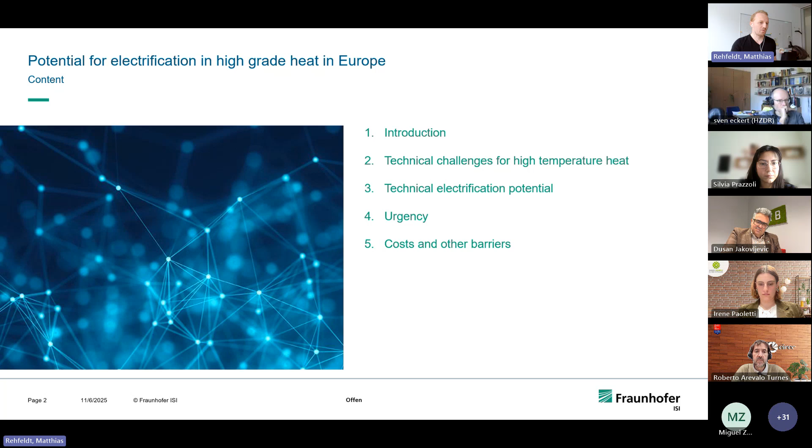Our main assumption is that the demand for basic materials like cement, steel, paper, plastics and so on will remain. By the end of this century, we will still be using these materials. However, the way we produce them has to change, and I want to make an argument for that on this slide.

Another third is coal and coal-derived energy carriers, mostly located in the iron and steel industry. Then we have some use of biomass, highly niche, where there are internal residues from production, so it's not something you can roll out across the entire process heat requirement. Lastly, at the moment roughly 4% of process heat production is electrified. This again is highly localized in the iron and steel industry for electric arc furnaces in the secondary steel production route, but not so much in other industries.

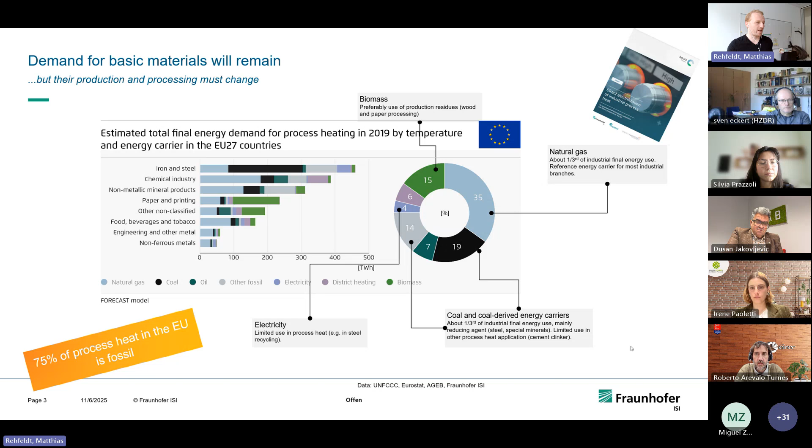So when we look at this process heat, it's not just any process heat. The temperature level is of high importance to identify which technologies could be used to decarbonize this energy use and what the challenges are. We distinguish two large categories: first, low to medium temperature heat, which is hot water and steam usually, and we make the cut at 500 degrees Celsius. In other publications it might be at 400 degrees, but that doesn't really change much.

For those high temperature heat applications, the technical solutions are highly specific. You cannot use the same furnace and kiln, so the same process heat installation, for the production of cement or for steel. It's very different, and that creates a challenge.

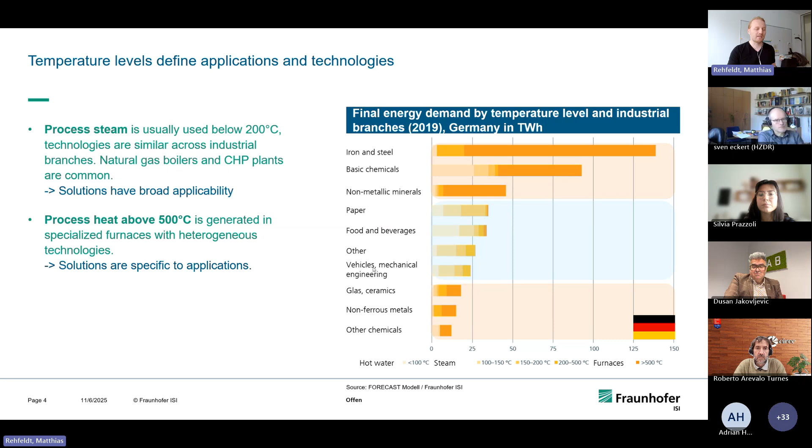Now, so far for the introduction. In the next few slides, I want to talk about what the technical challenges are actually, which potentials could still be realized and might be realizable in the next years, and third, what are the non-technical barriers?

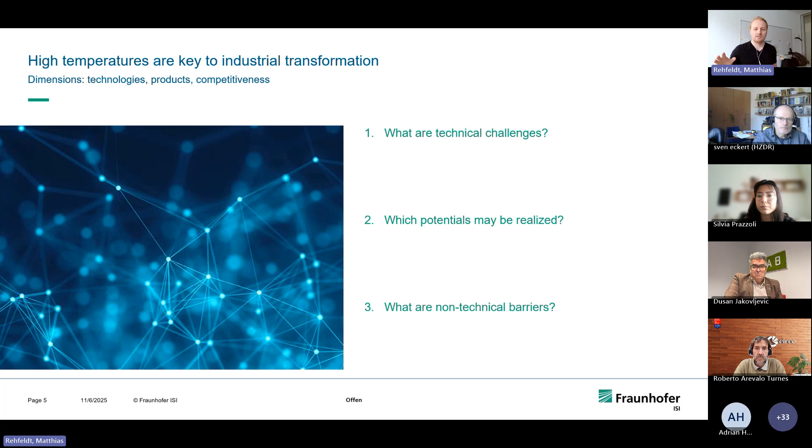Let's jump into it. First, let's start with the challenges for high temperature applications in process heat generation. On the left side are several technologies that might be used: heat pumps, electric boilers, obviously for the low temperature areas. Then we have resistance heating, which is currently the reference technology for electrification in the high temperature area. In addition, induction heating and electric arc furnaces. However, the latter two have restrictions in terms of materials that can be processed and geometries that can be processed.

I'm happy to say that in the next discussions we have, there will be some insights on how to extend these limitations or resolve them. Resistance heating is primarily limited by the energy density of the energy that can be applied, so for high temperatures and high capacities, there are currently limitations on what can be electrified.

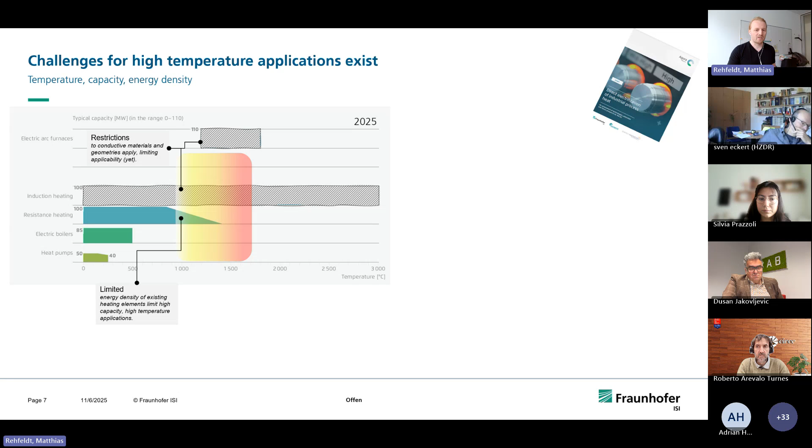Thus, there is a gap in the high temperature area, presented here roughly at about 1000 degrees Celsius, and in high capacities, there is a lack of technologies to cater to these demands.

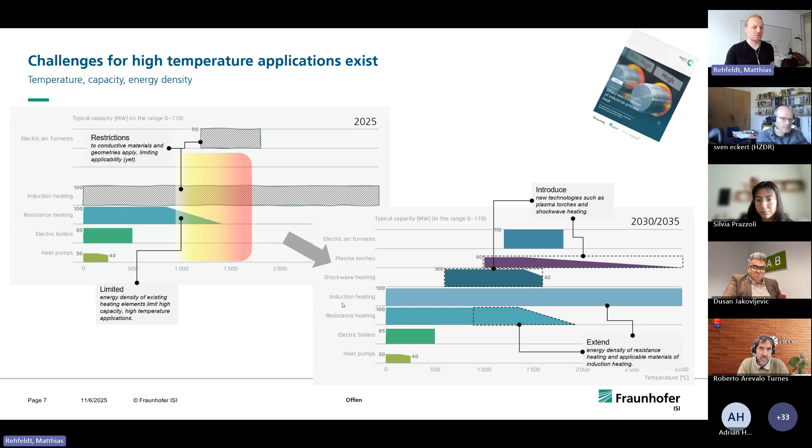In our publication, we investigated this and we see two options. First, we think that the applicability of induction heating and electric arc furnaces in some cases can be extended to more materials to resolve issues with geometries. The second would be to introduce new technologies currently not on the market, like plasma torches and shockwave heating. Together these could close the gap in the high temperature area we see and would allow us to electrify all of, or most of, process heat generation and demand.

That's the final energy demand in European industry as of now. We can see that about a third is already electrified. However, that's not process heat—that's usually electricity used for motors, drives, cooling, lighting, electrolysis, and so on.

However, already today, an additional 40% of the energy demand could be electrified with technologies already available. In many cases that's low to medium temperature heat, steam, hot water, but also high temperature heat is included. You can already address several applications of high temperature heat with existing technologies. We estimate that you need new technologies, or an extension of technology capabilities, to electrify an additional 20%, and we think these technologies can be available by 2030 or 2035.

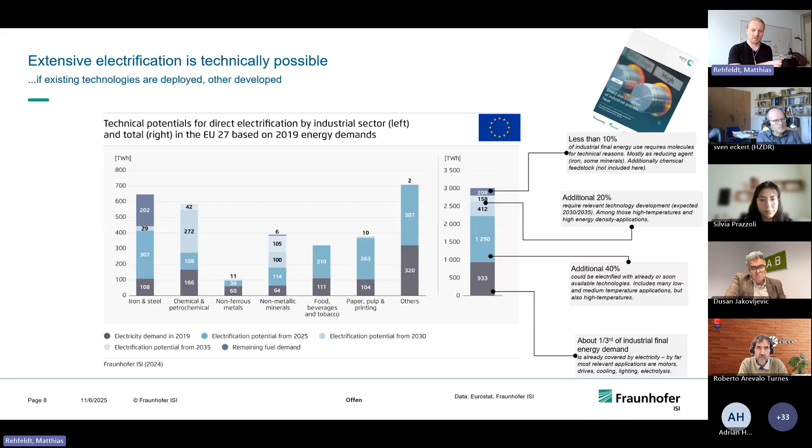This leaves us with just 10% of current industrial energy demand that cannot be electrified, mostly because it requires molecules for reduction, for example in the iron and steel industry.

There are some areas of energy use in the chemical industry not included here. Feedstock for the chemical industry needs molecules because it appears in the product, and that's not covered here, but it's a large share of the total energy use, up to 1000 terawatt hours. So there is still enough room to use hydrogen and other energy carriers.

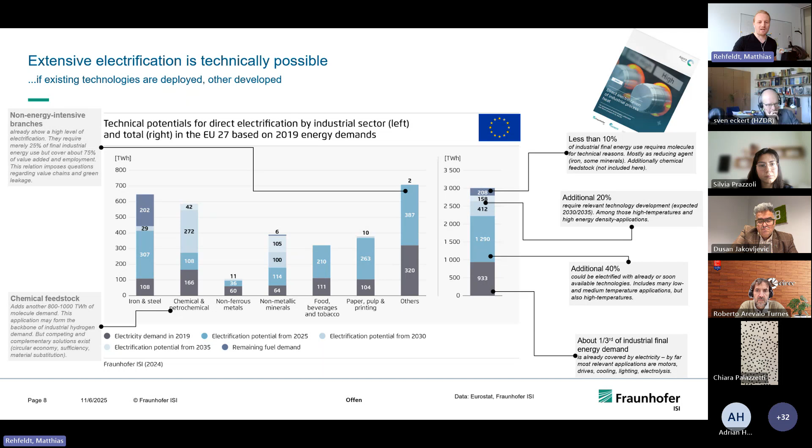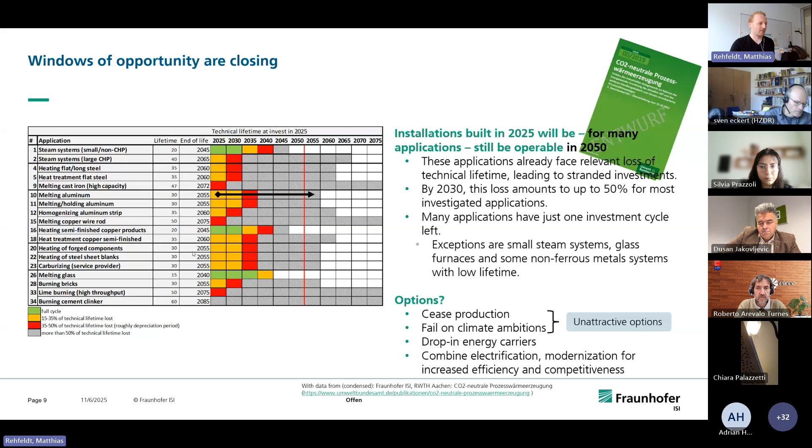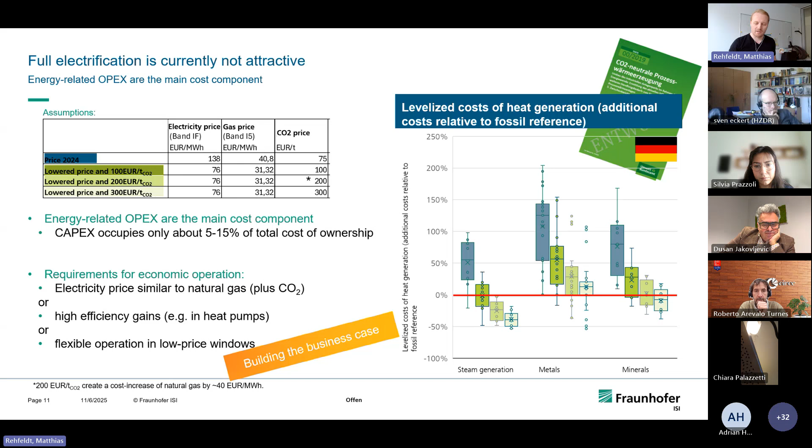So that's what Adrian mentioned—it's about building the business case. What can we do to reach this business case to enable the implementation of the technical potential I showed earlier?

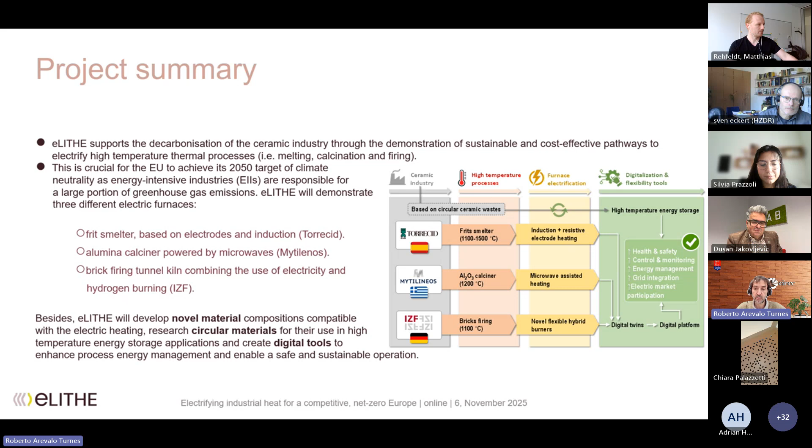On top of this, we are also developing new materials that are suitable for electric treatment, new materials to improve circularity, developing thermal storage systems, and also developing digital tools, as we'll explain later.

These are the figures of our project. We are 18 partners, 3 pilots, 3.5 million budget, and 4 years to make this happen. We are almost completing the second year.

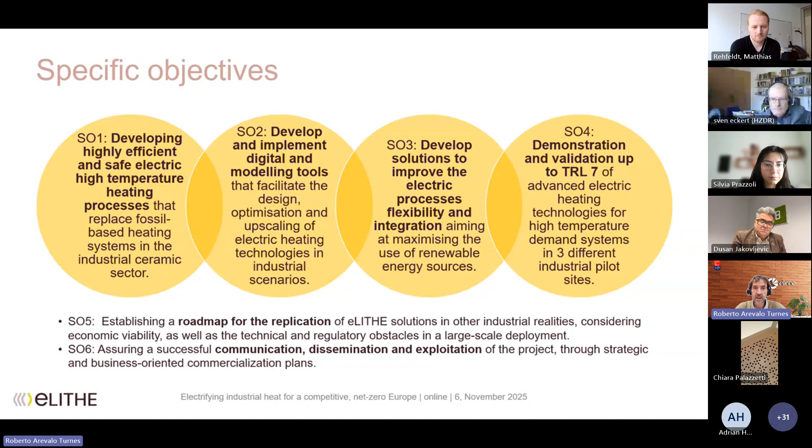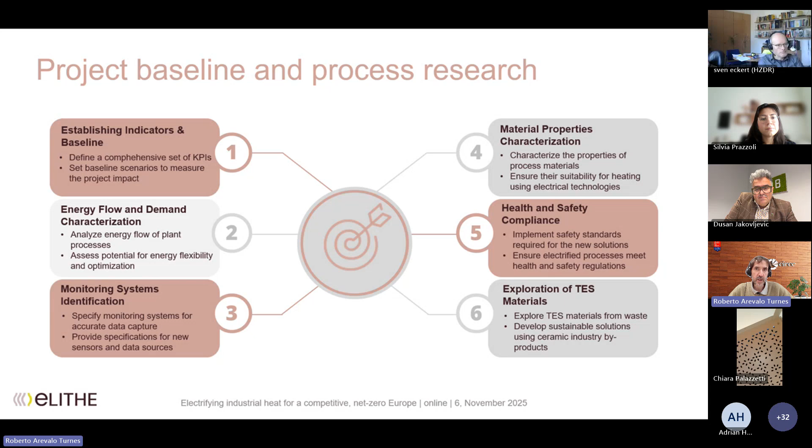Regarding the baseline of our project, this is already concluded, not going to stop very much here. We have established the characteristics of the processes, the materials needed, charted the energy flows, the possibilities of energy flexibility in each site, and so on.

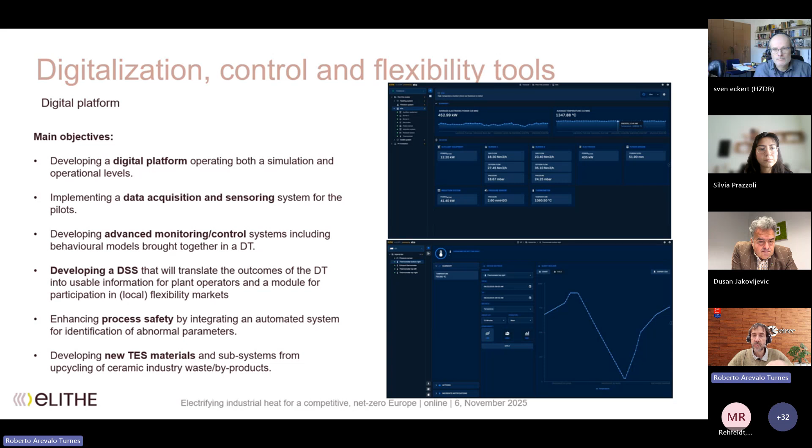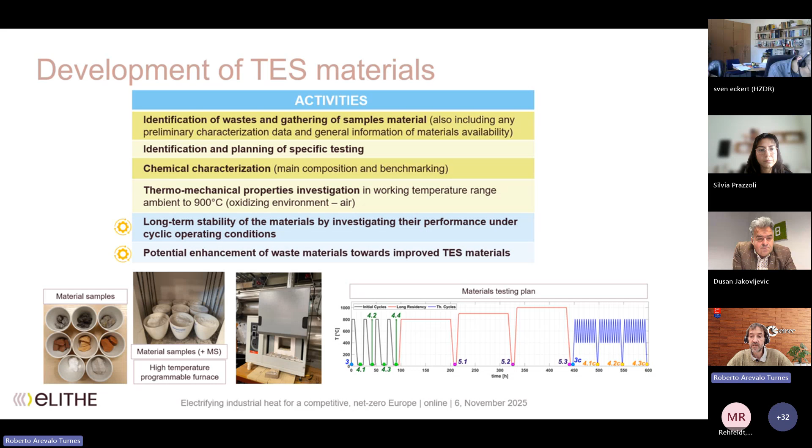Also within this task, we are developing the thermal storage materials. That is very exciting because they are being developed using wastes coming from each of the demo sites. We have already received them, as you can see below. We have characterized them, and now in KTH they are working towards the production of these materials that hopefully will be used within the demo sites themselves, completing the circularity of their processes.

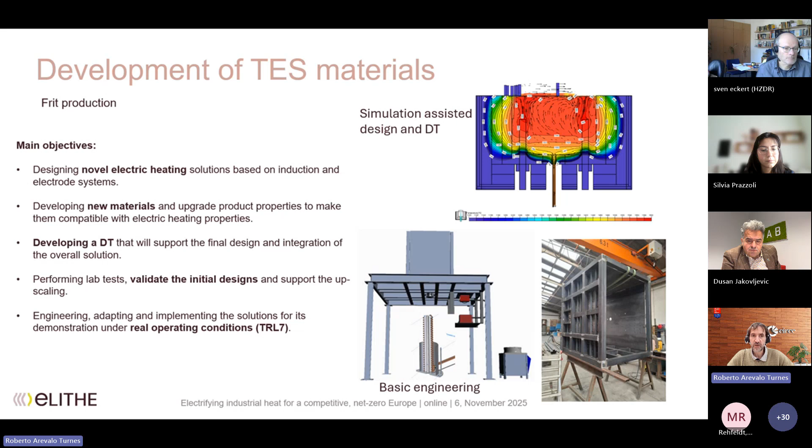This is part of the new materials, because of course changing from gas to electricity requires also new materials, both for raw materials and the materials that make up the furnace. This is part of the materials that we have developed and that are going to be tested in the new pilot.

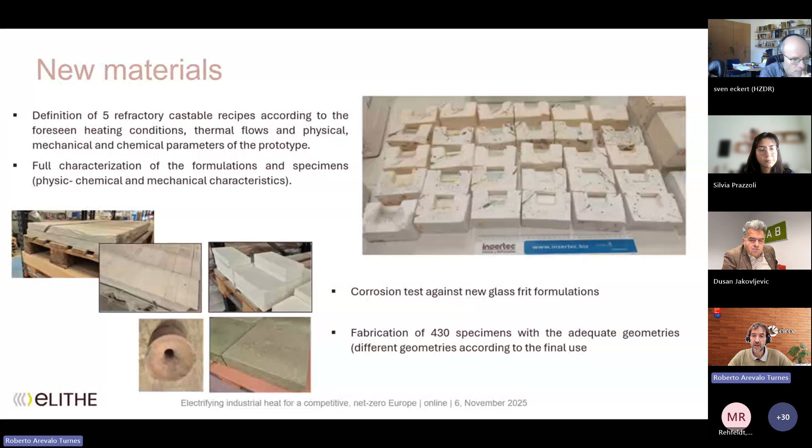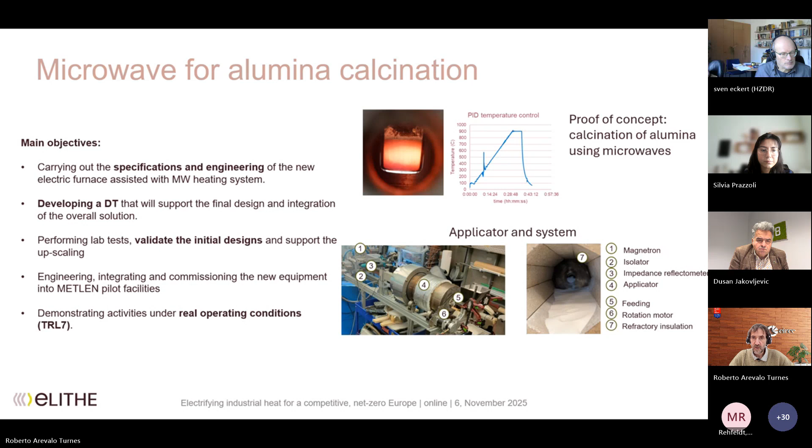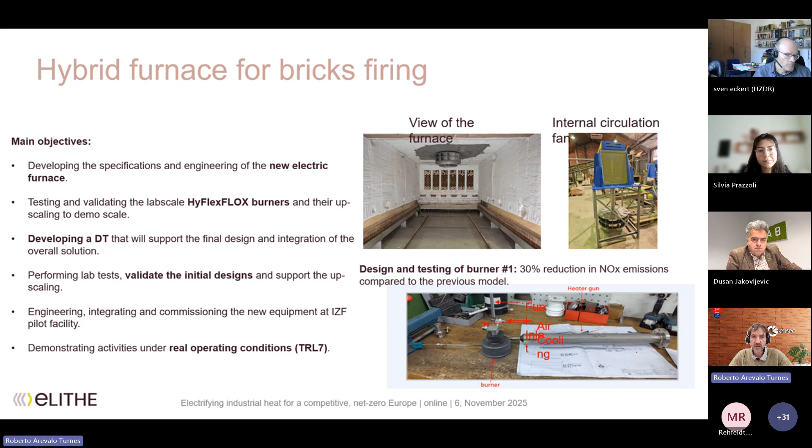And sorry, I forgot to include the consortium slide, but thank you, I conclude here. I'm available for questions later or at any moment.

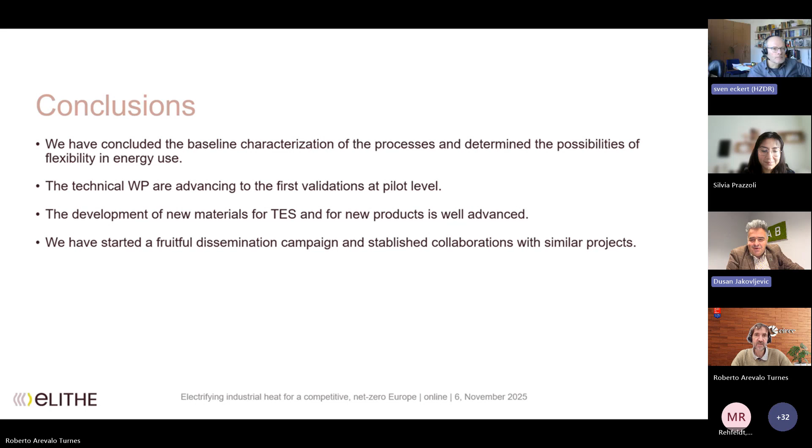Thank you so much, thank you very much, Roberto. And we will add the slide with the people also when we share the presentation. But this is very exciting, because I think it's great what CIRCE is doing and what you're leading on this sort of innovation. I didn't know it's the first time microwaves are tested with alumina, and it's very inspiring, and it actually really fits with what we had in the previous 2 presentations on policy initiatives, and then also on the market potentials. And it's clear that the research you guys are doing is very instrumental in filling both of these policy expectations and market potentials.

To carry on, we would like to hear more on the CITADEL project. Sven, you can share your slide.

Thank you. So, yeah, hello also from my side. I hope you can see my screen. I have shared, can you see? Okay, then let's start. My name is Sven Eckert.

I'm a scientist at the Helmholtz Center Dresden-Rossendorf in Germany. In our Institute of Fluid Dynamics, we are working on many projects to support the green transformation of the process industry, and electrification is one of these research projects. Here we are the coordinator of the CITADEL project, which is a very ambitious one, and it combines research institutes of Europe and industrial partners from 5 different demo cases. The logos of all the partners you can see here on the first slide.

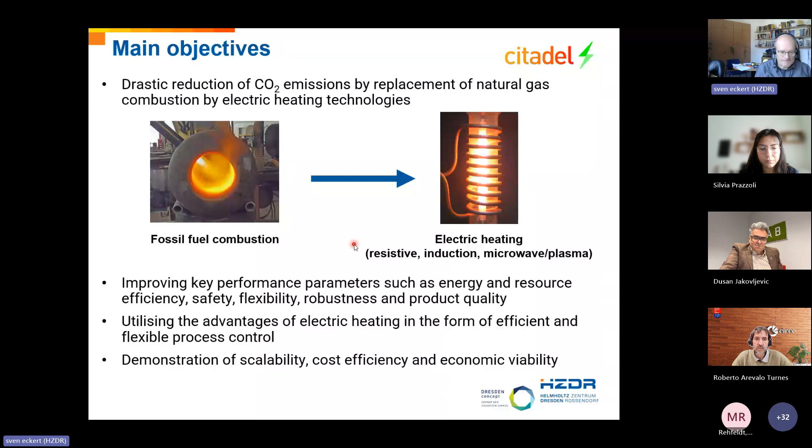So the CITADEL project is funded since last year. We are 14 partners from 7 European countries, and we focus especially on the high temperature processes. We have heard already from Matthias that in this area a lot of energy is consumed, and here also this is the source of dramatic CO2 emissions all over Europe.

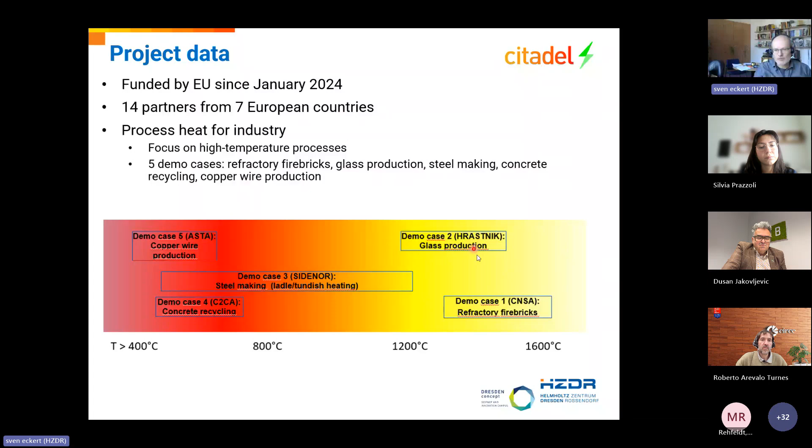In our process, we consider 5 different demo cases in the temperature range between 400 and 1600 degrees Celsius. We have the production of copper wires, an interesting project for concrete recycling, steel making with our Spanish partner SIDENOR, glass production, and the production of refractory fire bricks.

So, for each of these demo cases, we want to develop and implement demonstrators on the pilot plant scale. That means we are starting from a TRL level 5, and we would like to end up at a TRL level 7. Also, we do not look only for the technical solutions for the specific processes.

We also have to take into consideration that at the end, we need an effective use of renewable energies. Therefore we have to consider the interoperability with the electric grid, and maybe we have to see if there is a need for using some capacities for energy storage.

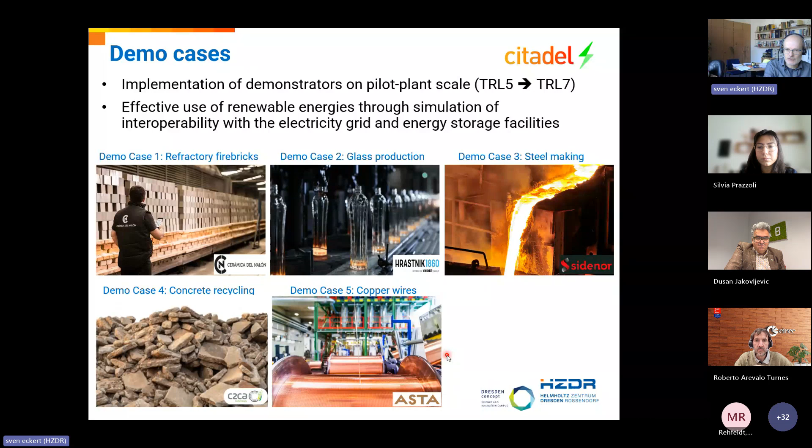Because in this short presentation I cannot show you all the details from all 5 demo cases, I will concentrate on demo case number 2.

So here you see what we want to do in terms of glass production. The industrial partner is the Slovenian industrial partner Hrastnik. They work with 2 glass furnaces. The operation temperature is more than 1300 degrees Celsius, and such a furnace has a throughput of about 160 tons of glass per day.

Our aim in the project is to install a hybrid furnace with a share of 60% electric heating. This should give us a saving of about 50% of natural gas and 35% of the CO2 emissions.

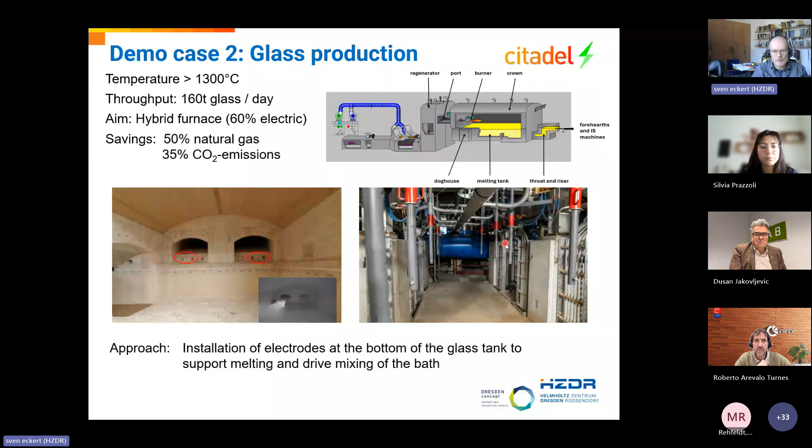And here you see already at the bottom, there are some locations already prepared where we install electrodes from the bottom in order to heat the glass melt from the bottom by applying electric current.

So for this furnace, we have already developed a furnace model, which gives us the possibility to do simulations regarding fluid flow in the turbulent flame in the combustion chamber, in the glass pool, and in the atmosphere above the glass pool. We have to consider different mechanisms for heat transfer.

First of all, the radiation heat, but also Joule heating by applying the electric current. So we have to calculate electrodynamics in order to see the closure of the electric currents. From this, we have to calculate the sources of the heat.

In this process, it's very important to look at the transport properties of the species in the melt. What are the main problems here? If we add electric heating to the process, we also alter the location of the heat sources. If we heat from the bottom, we create changes in the heat distribution, and this will also affect the flow in the glass bath and in the atmosphere of the combustion chamber.

We have shown that this could have an impact on product quality, so we have to take care that there is no increase of inclusions, and it's also very important to look at the coloring of the product. This gives an upper limit for the electric input, because if the electric current becomes too strong, we can observe bubble formation at the electrodes, and corrosion issues become more important. These are the problems and challenges we're working on in the project.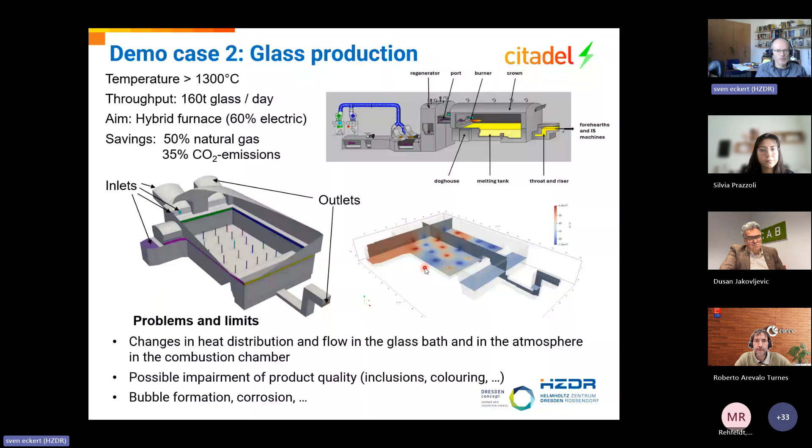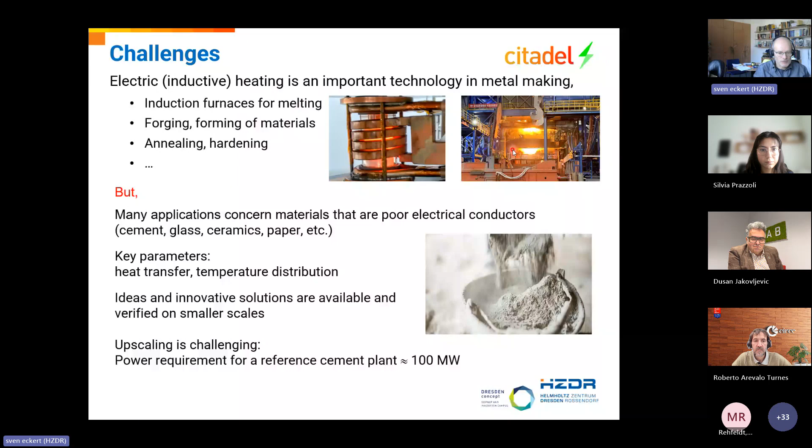For a typical cement plant, you need an electric heating input of 100 megawatts, and this is quite a lot—the same order of magnitude as electric arc furnaces in steel production. In steel, you have good heat conductivity; this is not the case for limestone. So you see we still have to do a lot of research and innovation in order to develop reasonable technologies at the end.

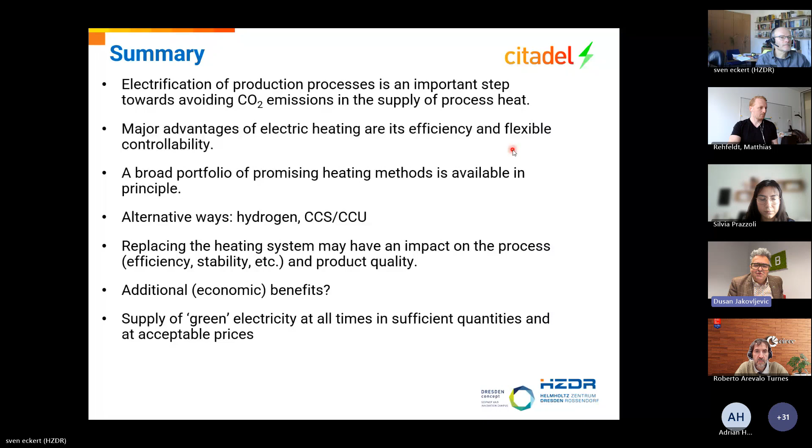At the moment I don't see any of the participants wanting to put questions through. If not, I would like Adrian, if you're still here, and Matthias, to reflect very briefly on what you heard from these technical project presentations. This is supported by the European Union, and we're all driving in one direction, but do you think there's a way for us to accelerate innovation in Europe, and how can we bridge this business model gap?

Matthias, I see you have your hand up, please start. Yeah, thank you, Julian, and also thank you Sven and Roberto.

I'm extremely thrilled to see that what I merely estimated in our report, based on some insights and discussions on these technologies we looked at, is actually being done right now. The projects are out there trying to tackle exactly these challenges we identified as stopping the electrification of process heat from happening in some areas. I think that's extremely important to close this gap, and these examples, as far as I could see, really have a big contribution to that.

But we should not forget that even if it's technology ready, we still have to create the conditions that make them attractive in the market. I think there's still a large gap, because we see that even existing technologies do not enter the market as they could and as they should from a climate perspective, and possibly, as Sven pointed out, also from an efficiency and competitiveness perspective.